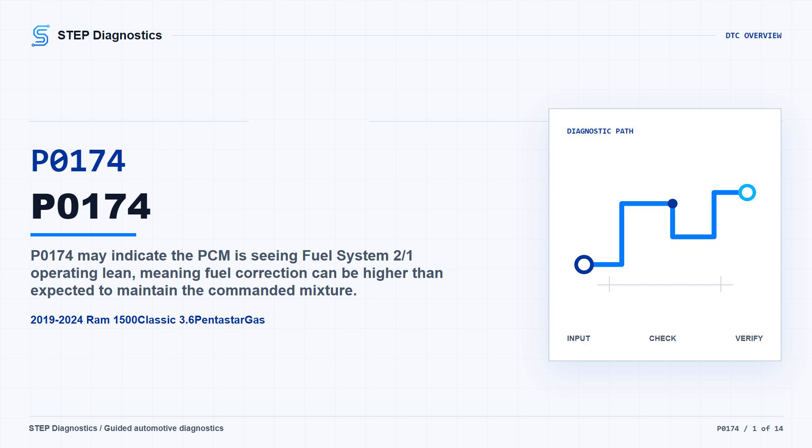On this 2019 to 2024 Ram 1500 Classic with the 3.6 Pentastar, P0174 means the PCM is seeing fuel system 2/1 lean. In plain terms, the computer may be adding fuel to correct a mixture that is coming up too lean.

The driver may see the MIL, and if the truck has stop/start, that system can be disabled while this code is active. A lean code like this can come from possible air leaks, fuel delivery issues, purge flow concerns, exhaust leaks, MAP or oxygen sensor signal problems, wiring issues, or less commonly, a PCM fault.

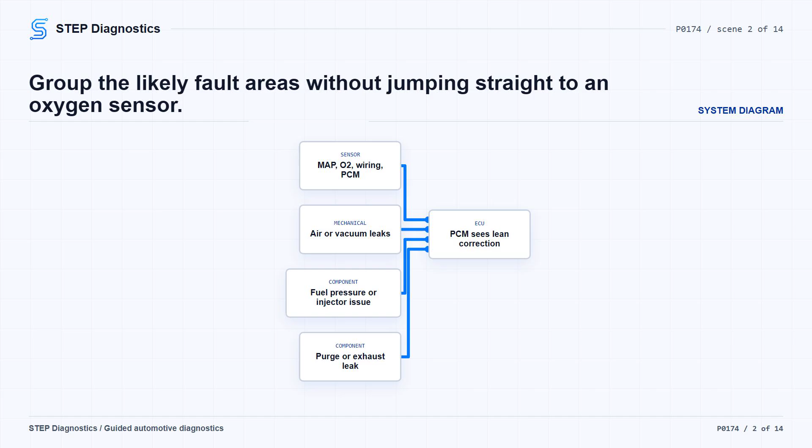Start with the basic system checks, then follow a structured diagnostic approach instead of jumping straight to a sensor. This system is trying to maintain a stoichiometric air/fuel mixture of 14.7.

Treat the running requirements as monitor gates: engine running in closed-loop fuel control, battery voltage above 11.0 volts, barometric pressure greater than 75 kPa, ambient temperature above -7 degrees C (20 degrees F), fuel level greater than 12%, and the altitude condition met.

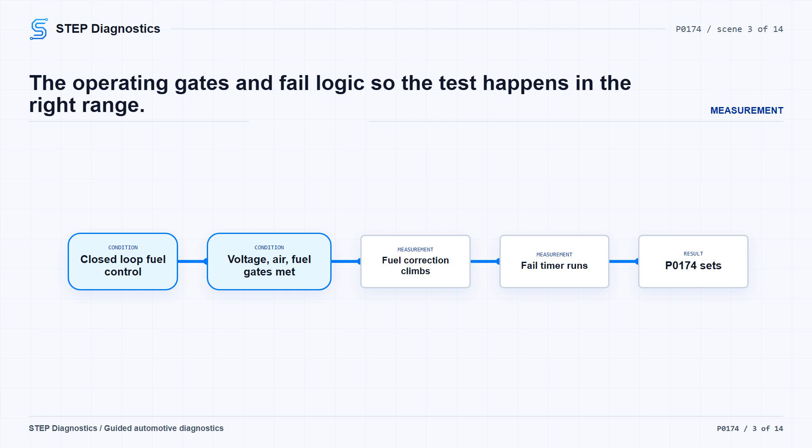The code sets when short-term and long-term fuel correction added together go greater than a calibrated threshold, generally 133%, where 100% is nominal. After approximately 30 seconds of fail time, the diagnostic fails. Use those conditions to reproduce the problem instead of testing it in the wrong operating range.

First, use the scan tool to read and record the DTCs and record the captured operating data. Start the engine and verify the fuel system is in closed-loop fuel control. Then operate the vehicle under the same kind of conditions that set the code, using the recorded data and the monitor conditions. Read DTCs again.

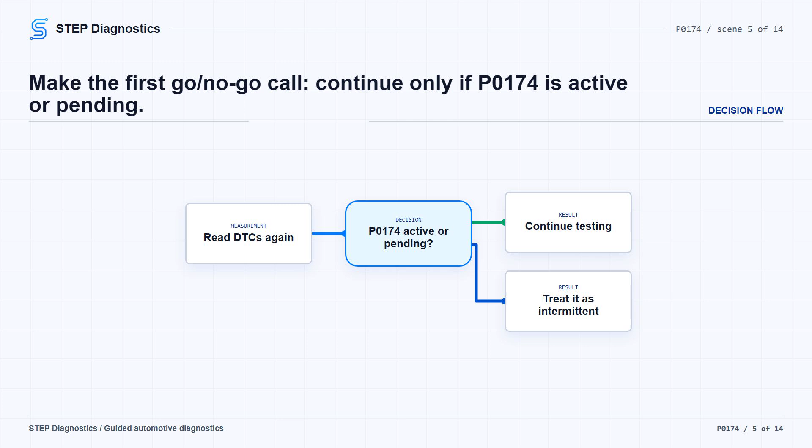If P0174 is active or pending, continue. If it is not active or pending, handle it as an intermittent condition, and do not force a hard fault diagnosis that is not there.

Next, look at the recorded DTCs. If other active or pending faults are present in the fuel or air handling side, diagnose those first. They can change the way this lean code is interpreted.

If there are no other fuel or air handling codes active or pending, move on to the MAP sensor operation check. Run the MAP sensor operation test. If that test finds a MAP-related problem, correct that problem and then verify the repair.

If the MAP check passes, shut the ignition off and inspect the mechanical and air side areas that can create a lean condition. Check the air induction system for leaks. Check the engine and all vacuum lines or hoses for vacuum leaks. Check the brake booster for an internal vacuum leak by watching engine speed and vacuum while pinching the vacuum hose going to the booster.

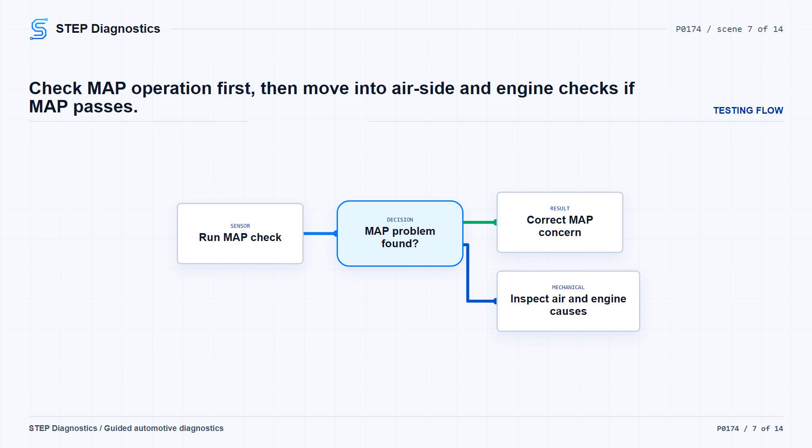If a restricted injector is suspected, remove the fuel rail with the injectors intact. Keep fuel pressure in the rail by energizing the fuel pump. Actuate the suspect injector or injectors with the scan tool and compare the spray pattern to the others.

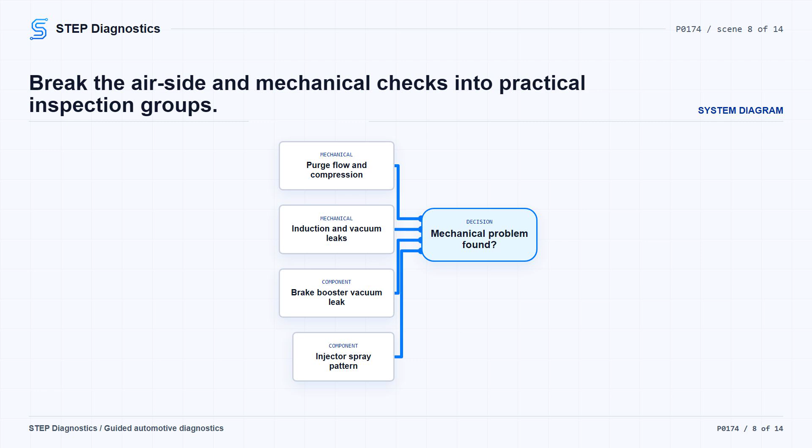Also check the purge flow system for free flow, leaks, restrictions, and the hose and connections between the purge solenoid and intake manifold. Engine compression must be within specifications. If a mechanical problem is found, correct it and verify the repair.

If not, continue to fuel delivery. Now check the fuel delivery system. If a fuel delivery problem is found, correct it and verify the repair. If fuel delivery checks out, check the ethanol content in the fuel. If the gasoline has an ethanol content issue, correct that condition and verify the repair.

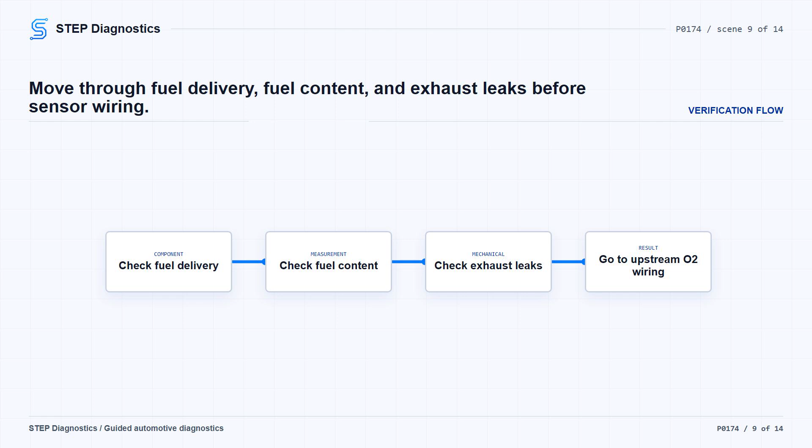If the fuel content is okay, check the exhaust system for leaks. An exhaust leak can mislead the upstream oxygen sensor and drive the fuel trims lean. If an exhaust leak is found, repair it and verify the repair. If no problem is found there, move into the upstream oxygen sensor wiring checks.

For the upstream oxygen sensor wiring check, disconnect the upstream O2 sensor harness connector and disconnect the PCM-C2 harness connector. Connect the adapter, GPEC Diagnostic 10436, to the engine harness side of the PCM-C2 connector. Do not connect the GPEC Diagnostic adapter to the PCM.

Also, do not probe the PCM harness connectors. Probing those terminals can damage them and create a poor terminal-to-pin connection.

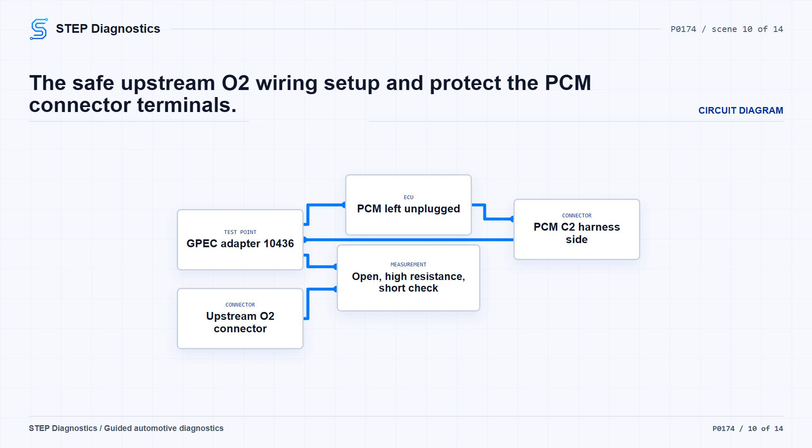With the adapter in place, check the upstream O2 sensor circuits between the O2 sensor connector and the adapter for a short to ground, and for an open or high resistance. If a wiring problem is found, repair the open or short circuit and verify the repair. If the wiring checks good, continue to oxygen sensor operation.

Run the oxygen sensor operation test. If that test finds an O2 sensor operation problem, correct the O2 sensor operation concern and verify the repair.

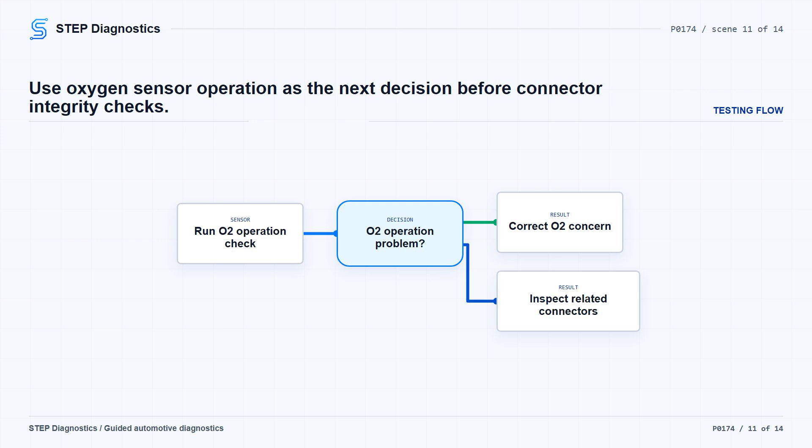If the O2 sensor operation test does not find a problem, go to the related harness connection checks before condemning anything else. Disconnect all PCM harness connectors, any related inline connectors if equipped, and the related component connectors. Inspect the harness connectors, component connectors, and male and female terminals for proper installation, damaged locks, corrosion, water intrusion, seal damage where used, bent terminals, overheated or discolored terminals from poor connection, and terminals pushed back into the connector cavity.

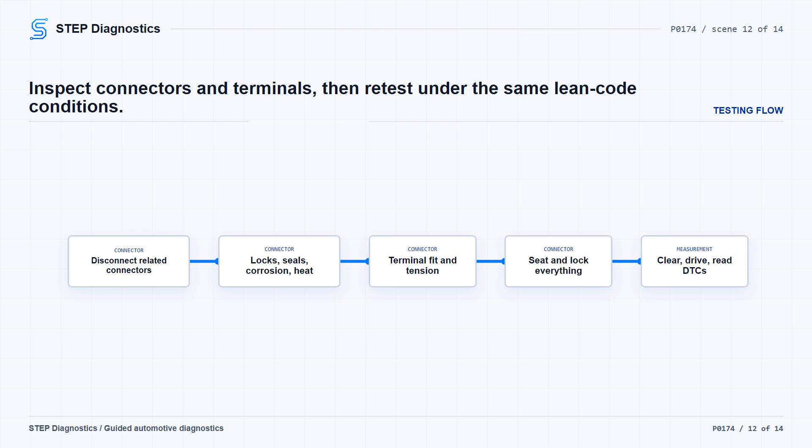Check for spread terminals and verify proper terminal tension. Repair any conditions found. Then reconnect the PCM connectors, inline connectors if equipped, and component connectors, making sure everything is fully seated and all connector locks are engaged.

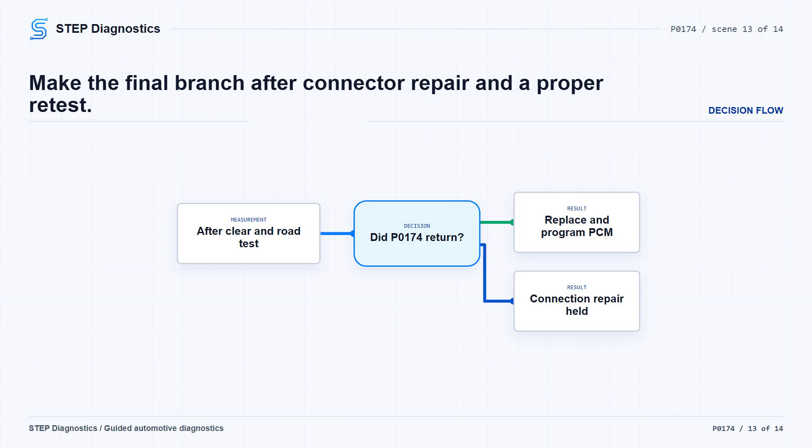Erase the DTCs, operate or test drive the vehicle under the monitor and set conditions, and read DTCs again. If P0174 returns after that, this diagnostic path supports replacing and programming the PCM, then verifying the repair. If it does not return, the wiring or poor connection issue has been corrected, and the repair still needs to be verified. Keep the verification step separate from the testing.

Anytime you repair a found problem on this path, clear the code, reproduce the operating conditions, and confirm the code stays gone. The takeaway is simple.

P0174 is a lean correction code, and on this truck the diagnostic path works from active code confirmation, to air and mechanical causes, to fuel and exhaust checks, then oxygen sensor wiring and operation, and only then connector integrity and the final PCM decision.